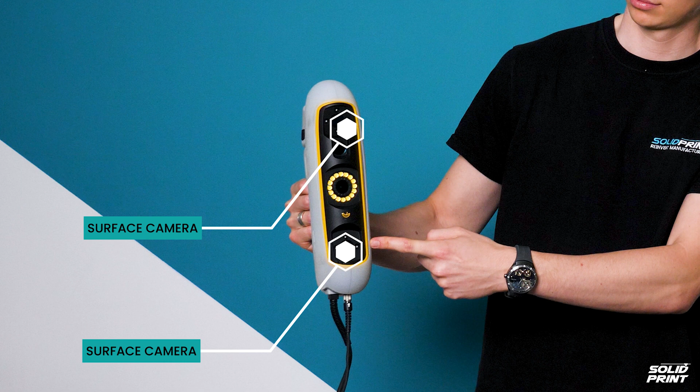The new Peel 3 scanner is lightweight, at just under 1 kilogram, and features an array of upgraded cameras and sensors to help capture part surfaces quicker than ever. We have geometry and surface cameras at the top and bottom, surrounded by infrared lights, which are used to see the targets placed on the object. In the centre, we have a ring of LED lights to illuminate the part's surface, and a texture and colour camera for scanning in full colour.

Finally, we have an infrared projector which projects a series of lines over the object, which are reflected back and allow the scanner to determine the distance to the surface. On the back, there's a touchscreen which gives easy control of zoom and exposure settings. The scanner has 2 ports, a USB port which connects to your laptop and a power port which leads to your mains socket.

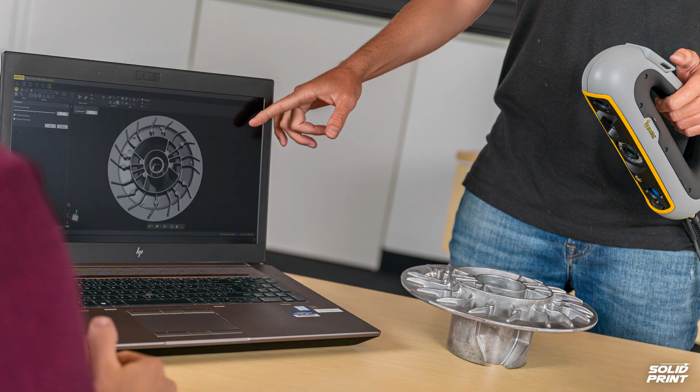Your scanner can be calibrated in seconds and will ensure that it's capturing the geometry with optimal accuracy. A single calibration can last up to 7 days, providing that you're scanning in the same environment. To calibrate your scanner, simply place the calibration plate on the open rugged case and follow the on-screen prompts. Hold the scanner squarely above the plate and slowly move vertically upwards, using the haptic feedback and software interface to help. Finally, sit the plate on its angled slot and repeat the process.

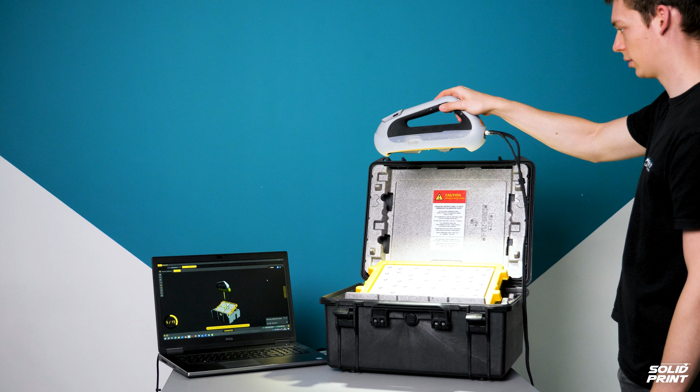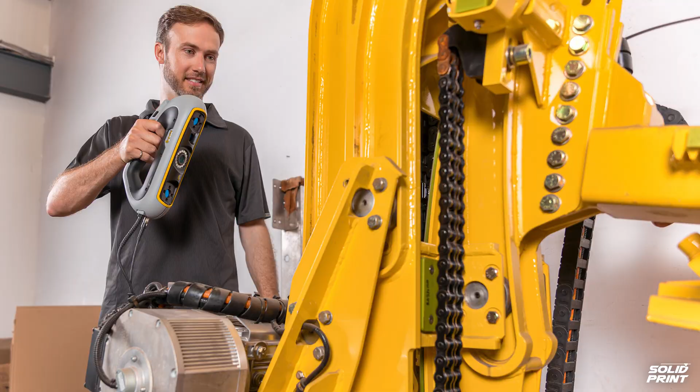The Peel 3 works best in artificial lighting conditions on objects ranging from 10 cm to 3 meters in size. If you're scanning parts with repeating geometry or symmetry, then targets are your best friends. Targets allow the scanner to maintain knowledge of its position accurately, meaning that tracking will be maintained reliably, improving the output mesh. The Peel 3 uses 6mm targets, which are available in adhesive or magnetic versions. With sufficiently complex geometry, targets may not be necessary, but they can make merging scans simpler later on.

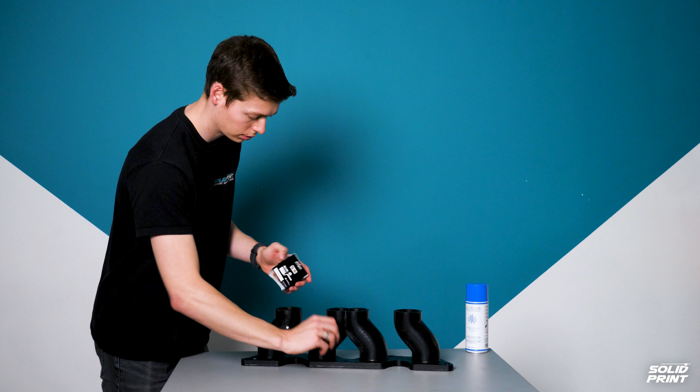Targets should be placed as randomly as possible, with a spacing of around 5 to 10 centimeters. If your object has shiny surfaces, then a light coating of evaporating scanning spray to dull the surface can help to reduce noise. Just make sure that you spray before you target. Start scanning by pressing the play button on the touchscreen. Then hold your scanner around 30 centimeters from the object.

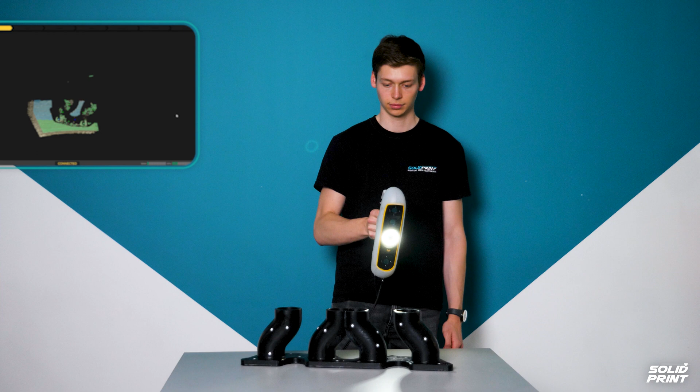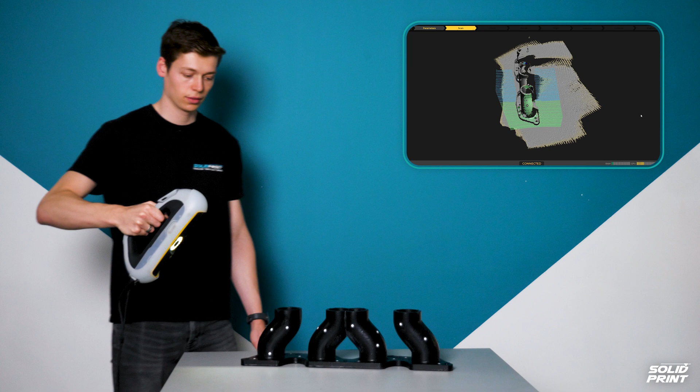You'll notice your parts start to appear on the computer screen as surfaces are captured. The green regions of the model indicate that you're holding the scanner at the optimal focal length, while red areas indicate that you're too close and blue too far away. We recommend moving slowly to avoid losing tracking. On average, you can capture an area of 1 meter squared in about 1 minute, depending on the part's complexity.

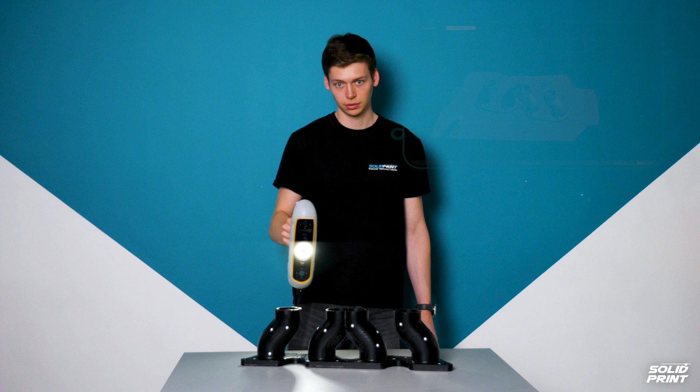If you're using a turntable, try and keep your hands out of the frame and spin the plate smoothly. If your model contains small holes, change the angle of the scanner to capture the entire edge as completely as possible. The minimum hole size is 3mm for detailed capture. Next up in the step-by-step workflow is clean. First, we'll remove the background by selecting our turntable.

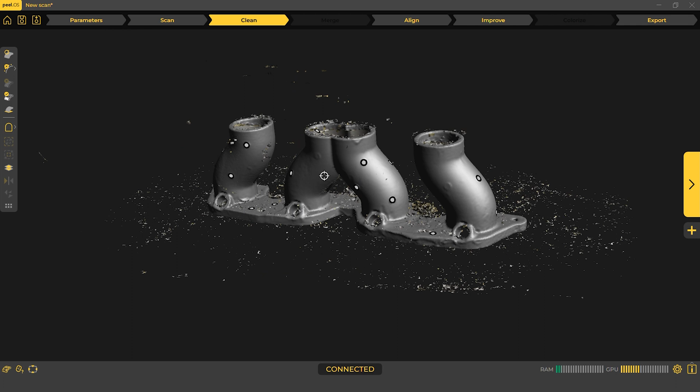Next, you'll have the ability to remove isolated patches, also called noise, and manually highlight areas of triangles to keep or delete. Various selection tools allow you to highlight the desired areas of your scan quickly and efficiently. Here you can also add a second scan within the same session, which can be merged together later. This enables the part to be rotated so that underside faces can be captured. When creating a second scan, ensure that you capture common surfaces in order for the software to automatically merge the scan based on target positioning.

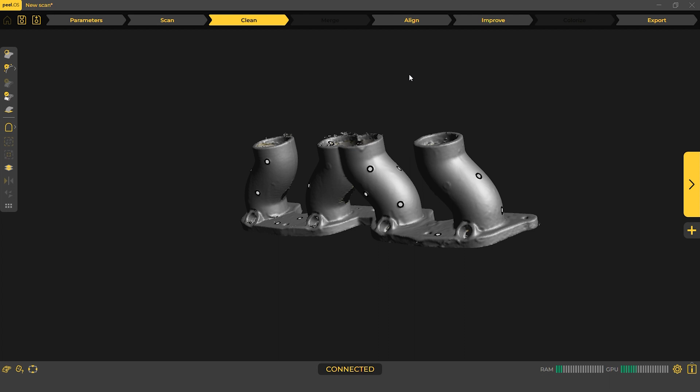In the alignment step, you can manually rotate the scan and drag the origin as desired. Generally, however, for parts with flat surfaces, this is best done later once planes have been created in Peel CAD. At the Improve stage, we have additional options to measure distances on the part and clean the mesh to automatically remove any abnormalities. We can also fill holes where open boundaries exist and decimate the mesh to reduce the number of triangles while preserving the geometry.

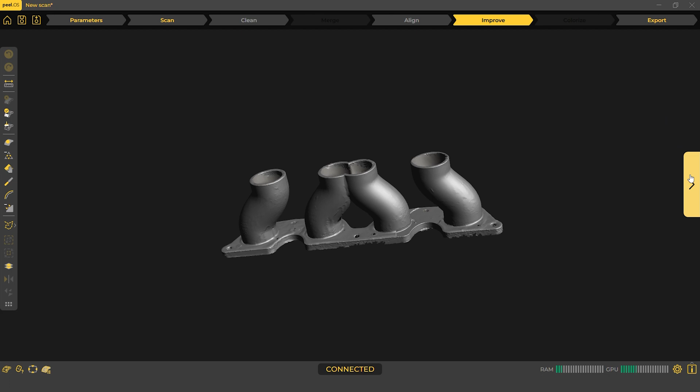We have a sandpaper tool to smooth out rough surfaces and a sculpting tool to engrave or emboss pathways. We can also edit boundaries to smooth edges or fit to desired shapes and remove spikes and outcropping triangles, giving a full suite of tools to tidy up the scan for the most efficient reverse engineering process later on. If colour scanning was selected, then your model can now be colorized. Finally, we can export the scan in two ways. The first is to save a mesh file, most commonly as an STL, and the second is to export into the Peel CAD software, a bespoke reverse engineering tool.

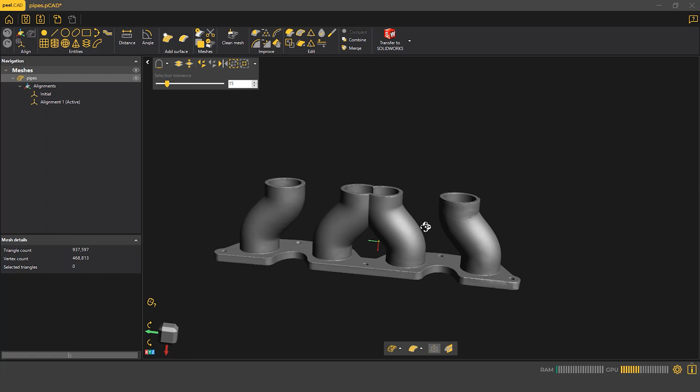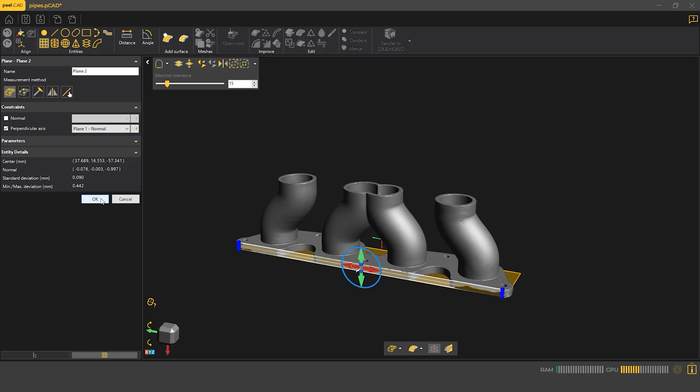Peel CAD is a bridging software, allowing the creation of entities and features which will help to speed up the reverse engineering process. When importing an STL mesh into SolidWorks, a graphics body is created, with no selectable faces or edges. This makes modelling really tricky, as you can only use the scan as a ghost image to trace over. Using the Peel CAD software allows our 3D modelling workflow to be far more streamlined. We can create points, circles, slots, planes, cylinders, cross-sections, pipe center lines, and silhouettes, and more, generating sketches or solid bodies which can be directly transferred to SolidWorks.

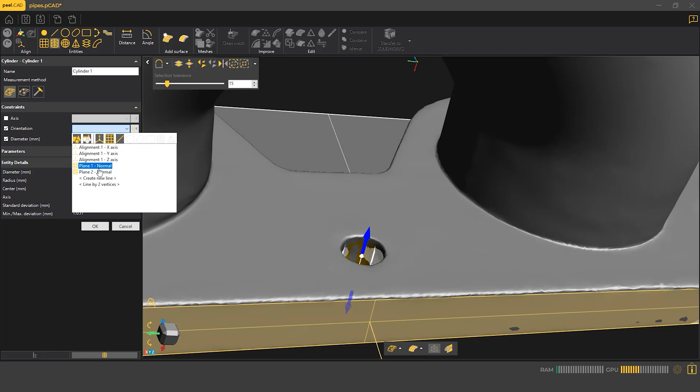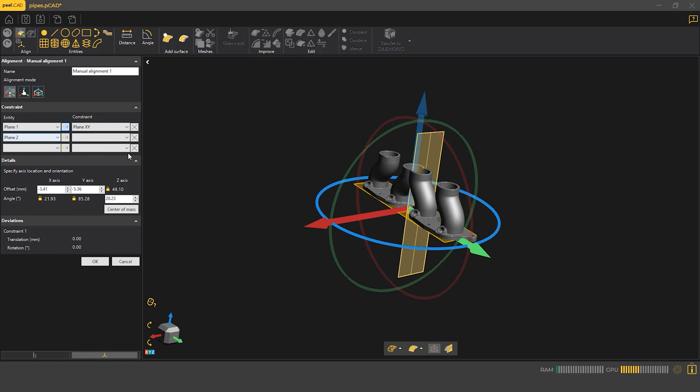We can add auto surfaces or single patch surfaces for organic geometry that may be difficult to model. Mesh triangles can be copied or deleted to focus on particular areas of the scan, and additional improve and edit tools are also available, such as remeshing and defeaturing, as well as cutting, extruding and mirroring the mesh. On the far end, there are tools for combining, merging and comparing meshes if multiple scans exist in separate files. Now that we've seen all that the Peel 3 scanner has to offer, stay tuned for part 2, where we'll walk through the full reverse engineering process using SolidWorks CAD software.